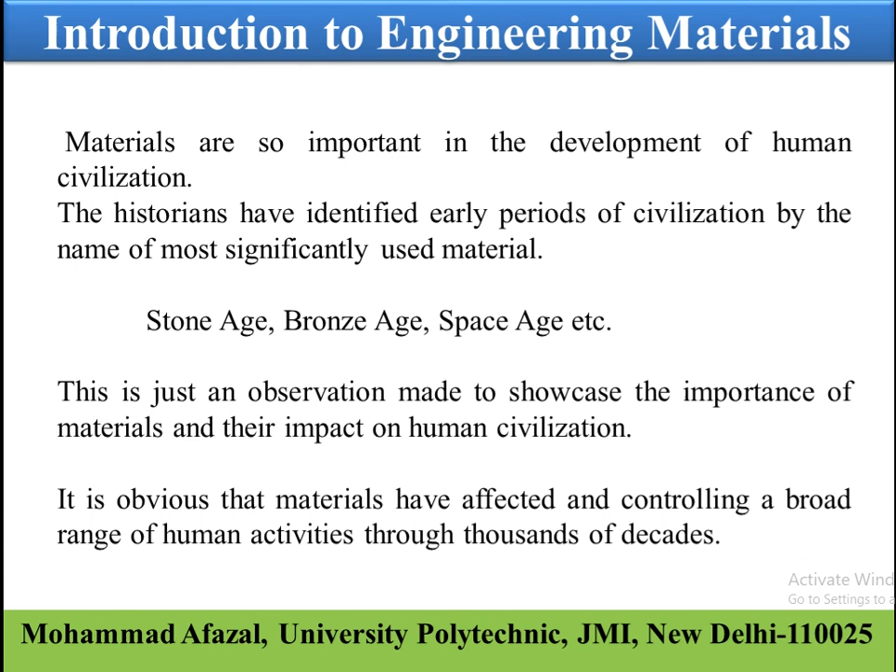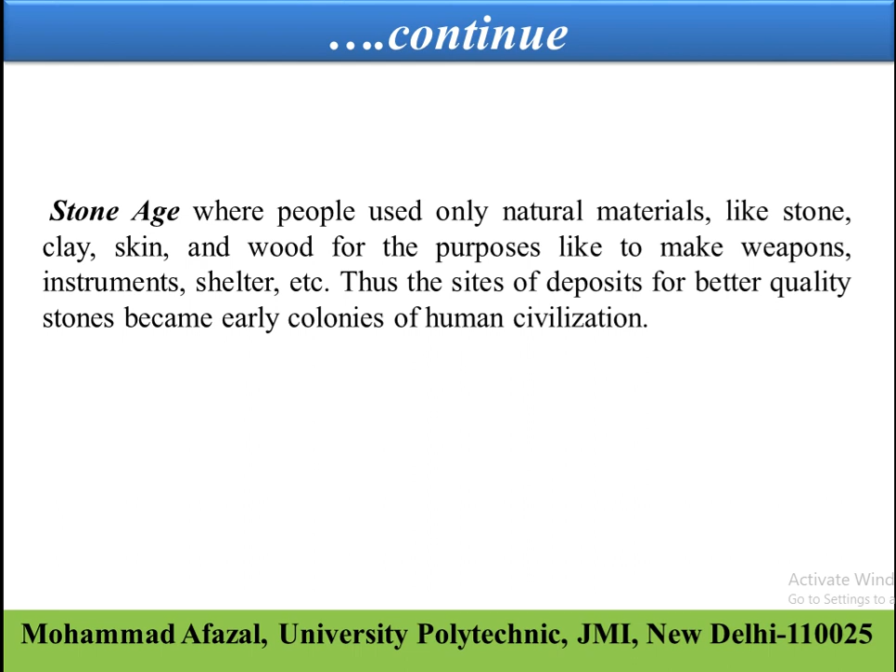Coming to the Stone Age, that was a very early stage when human beings came in contact with any kind of material. In this age, people used only natural materials like stone, clay, skin, and wood to make weapons, instruments, shelter, etc. Thus, the sites of deposits of better quality stones became early colonies of human civilization.

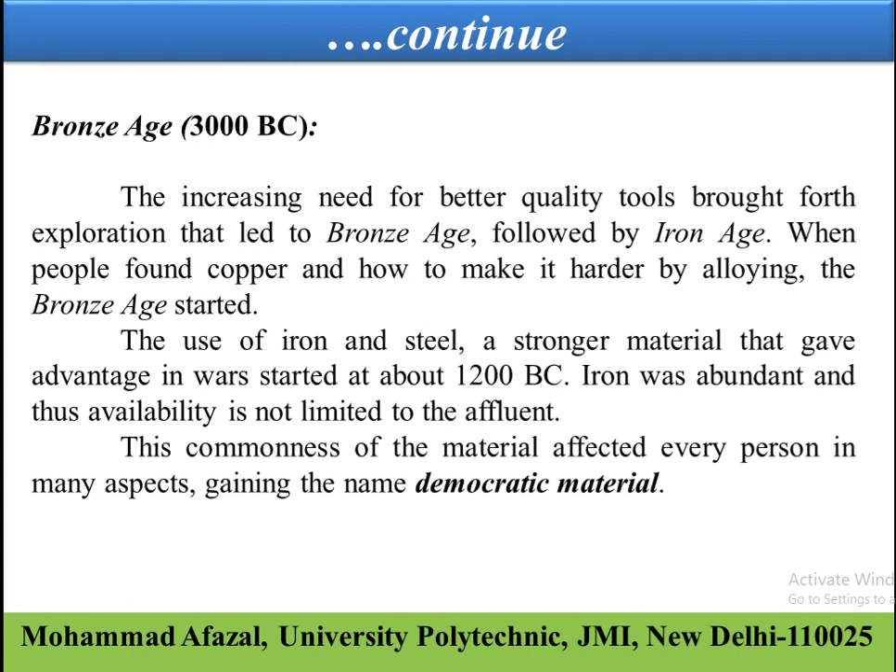Moving forward to the Bronze Age, which came around 3000 BC, the increasing need for better quality tools brought forth exploration that led to the Bronze Age, followed by the Iron Age. When people found copper and how to make it harder by alloying, the Bronze Age started. The use of iron and steel, a stronger material that gave advantage in wars, started about 1200 BC. Iron was abundant and thus its availability was not limited to the affluent. This commonness of the material affected every person in many aspects, gaining it the name of a democratic material.

The next big step in human civilization was the discovery of a cheap process to make steel, which enabled the railroads and the building of the modern infrastructure of the industrial world. One of the most significant features of the democratic material is that the number of users just exploded. Thus, there has been a need for human and material resources for centuries, which is still going strong.

Coming to the next age, that is known as the Space Age. It is said and agreed that we are presently in the Space Age, marked by many technological developments in materials, resulting in stronger and lighter materials like composites, electronic materials like semiconductors, materials for space voyage like high temperature ceramics, biomaterials, etc.

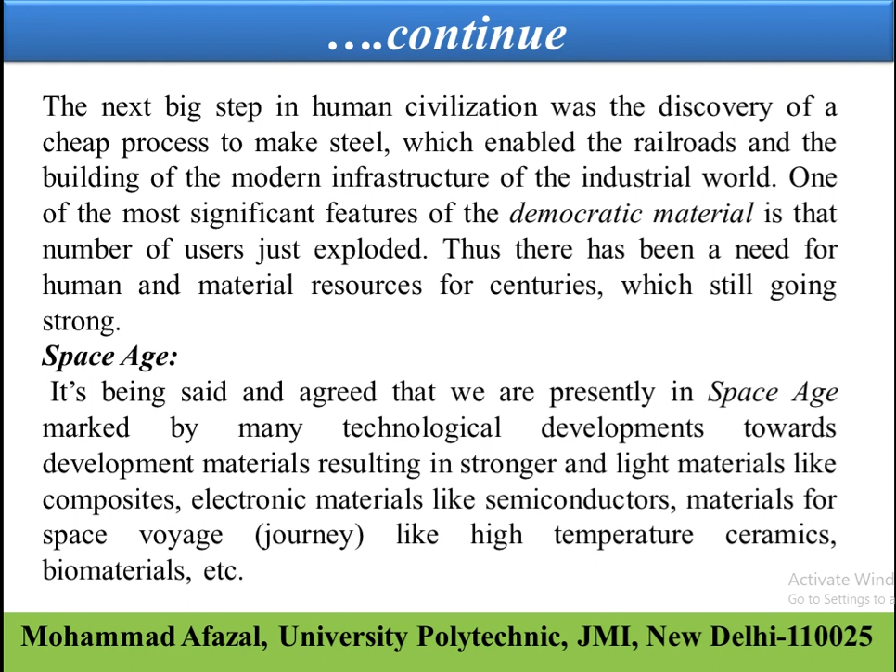If we summarize the findings of these civilizations in respect of materials and their utilization, the Iron Age brought tools and utensils, the Steel Age brought railroads, instruments, and the Industrial Revolution. The Space Age brought materials for stronger and lighter structures, that is, composite materials. The Electronic Age brought semiconductors and thus many varieties of electronic gadgets.

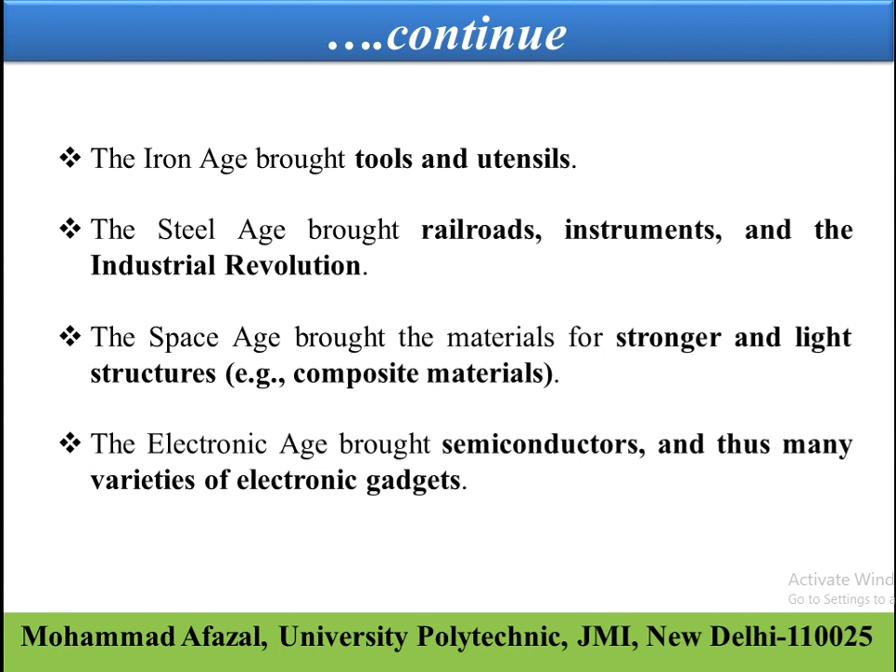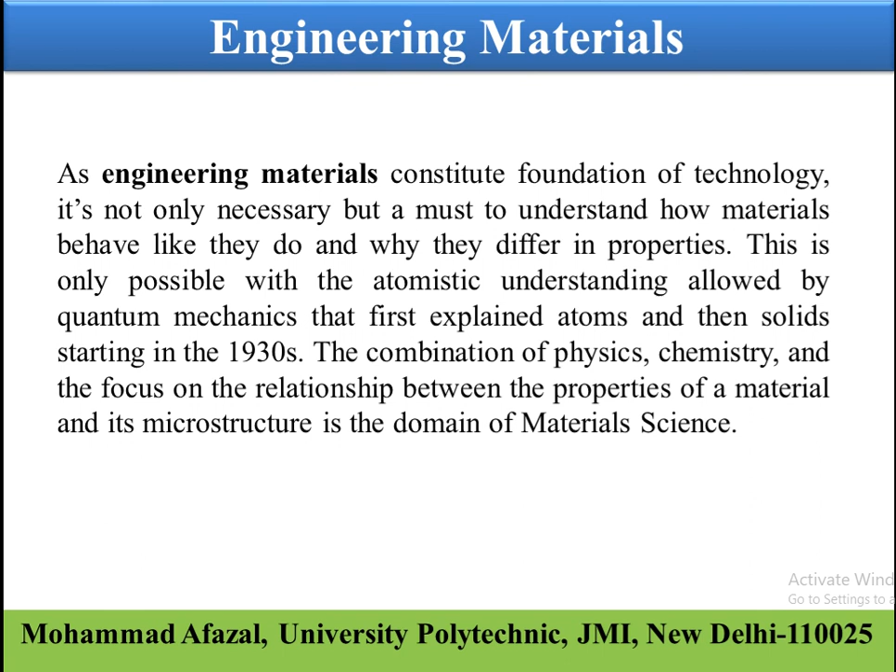Coming to the next point, how materials are used in technology and how they affect the current life of human beings. As engineering materials constitute the foundation of technology, it is a must to understand why materials behave like they do and why they differ in properties. This is only possible with the atomistic understanding allowed by quantum mechanics, which first explained atoms and then solids, starting in the 1930s. The combination of physics, chemistry, and the focus on the relationship between the properties of a material and its microstructure is the domain of material science.

Material science is a subject which must be studied by each and every engineer irrespective of their domain. All engineers need to know about materials; even the most immaterial fields like software or system engineering depend on the development of new materials, which in turn alter the economics, like software-hardware trade-offs. Increasing applications of system engineering are in materials manufacturing and complex environmental systems. Innovation in engineering often means the clever use of a new material for a specific application, for example, plastic containers in place of age-old metallic containers.

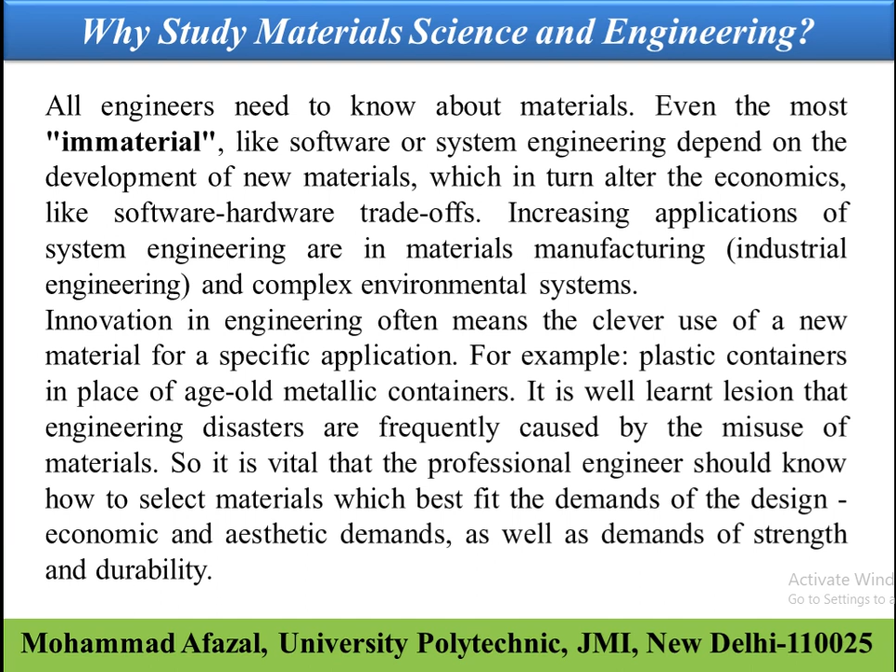It is a well learnt lesson that engineering disasters are frequently caused by the misuse of materials. So, it is vital that professional engineers know how to select materials which best fit the demands of design, economic and aesthetic demands, as well as demands of strength and durability. Beforehand, the designer must understand the properties of materials and their limitations. Thus, it is very important that every engineer study and understand the concepts of material science and engineering.

This enables the engineer to select a material for a given use based on consideration of cost and performance, to understand the limits of materials and the change of their properties with use, and to be able to create a new material that will have some desirable properties.

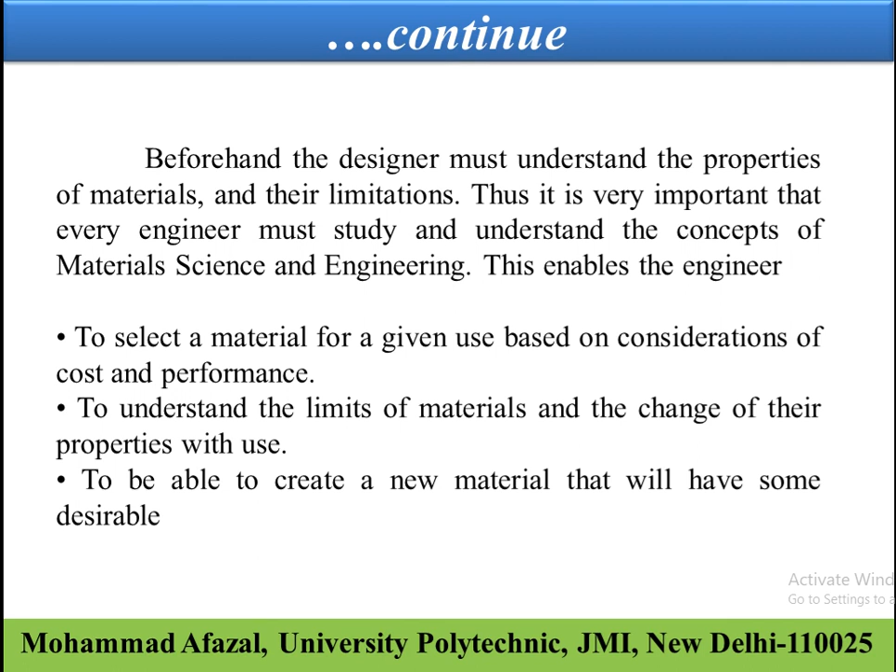Moving further on to the classification of materials. Basically, the materials at very primary stage are classified in two ways: one is metals and the other non-metals. The metals part comprises elements like cast iron, steel, copper, zinc, silver, gold, tin, etc. And non-metals have wood, plastic, wax, clay, ceramics, composites, thermocol, etc.

Further, metals are classified as ferrous metals and non-ferrous metals. Ferrous metals comprise cast iron, steel, wrought iron, etc. And non-ferrous metals have brass, bronze, nickel, silver, gold, etc.

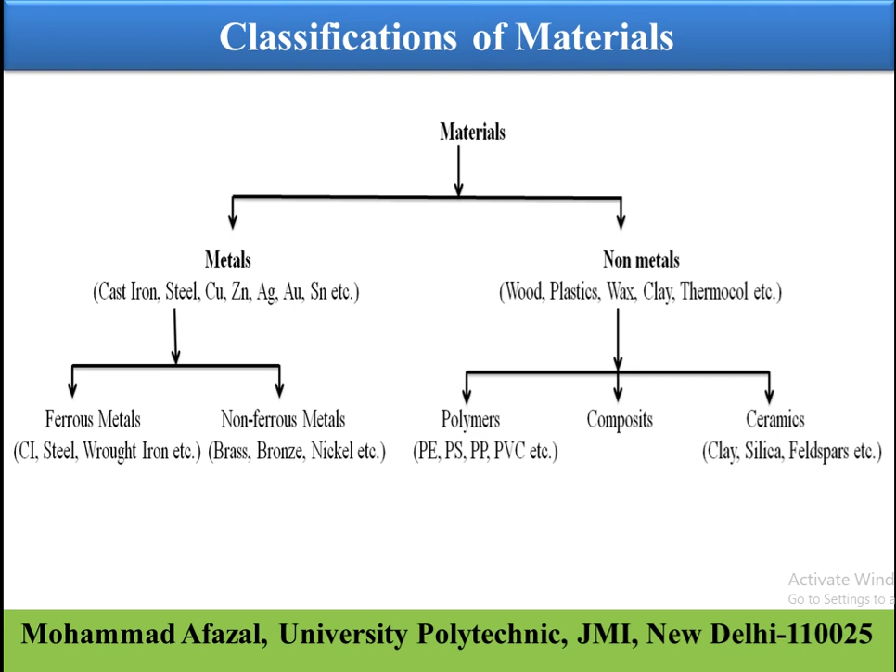Further, non-metals are classified as polymers, composites, and ceramics. Polymers have polyethylene, polystyrene, polypropylene, polyvinyl chloride, etc. And ceramics have clays, silica, feldspars, etc.

So moving on to material classification into metals and non-metals, and further metals into ferrous and non-ferrous metal. If we go on to the short definition of ferrous and non-ferrous metals, ferrous metals are those metals in which iron is their main constituent.

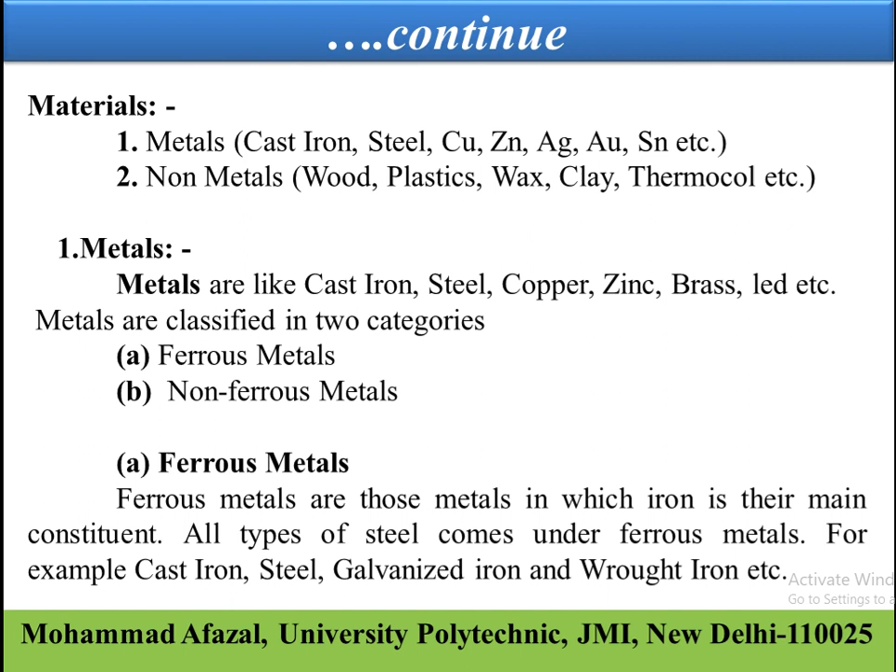All types of steel come under ferrous metals. For example, cast iron, steel, galvanized iron, and wrought iron, etc.

Non-ferrous metals are those metals in which a metal other than iron is their main constituent. For example, lead, copper, zinc, brass, tin, etc. falls under the category of non-ferrous materials.

Non-metals are like glass, plastic, rubber, Teflon, composites, etc. Further, one more category of metal comes by mixture of metals and non-metals in an appropriate ratio. Alloys are a mixture of metals and some non-metals such that there are at least two metals and other non-metals. For example, stainless steel, which has two metals as nickel and chromium, makes an alloy.

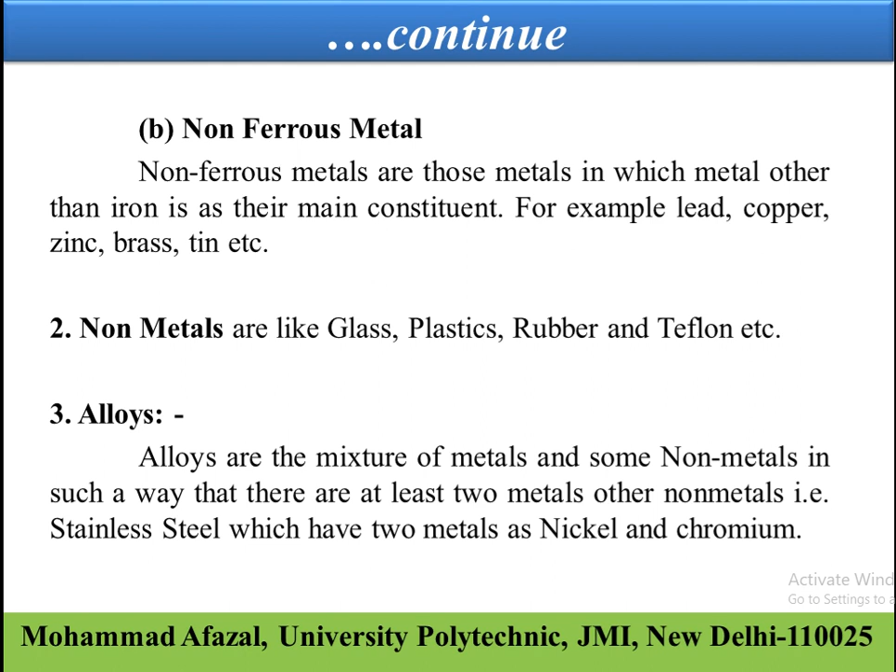Moving forward to the properties of materials, we will go for properties like physical properties, mechanical properties, electrical properties, thermal properties, and chemical ones.

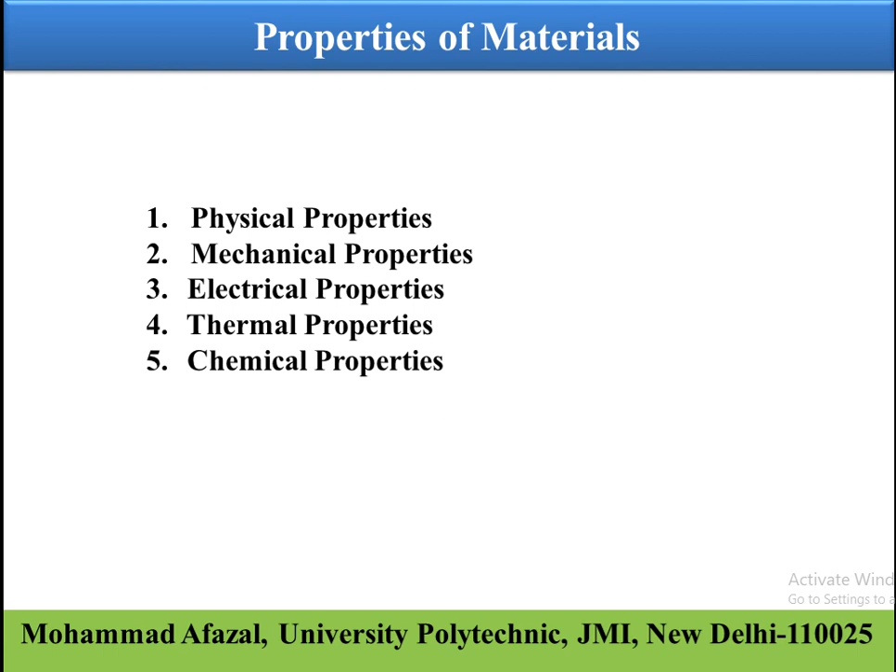We will go into detailed study of the properties of material, starting with physical properties such as shape and size, dimensions, color, appearance, density, porosity, and structure.

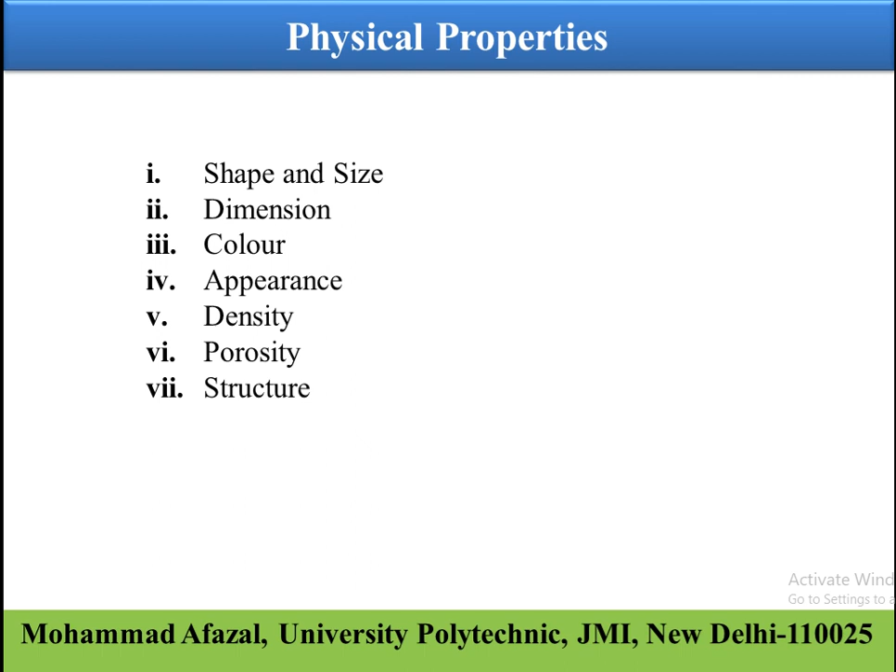Mechanical properties include elasticity, plasticity, ductility, malleability, brittleness, and so on. Next are electrical properties, which include resistivity, conductivity, dielectric constant, dielectric strength, and thermoelectricity.

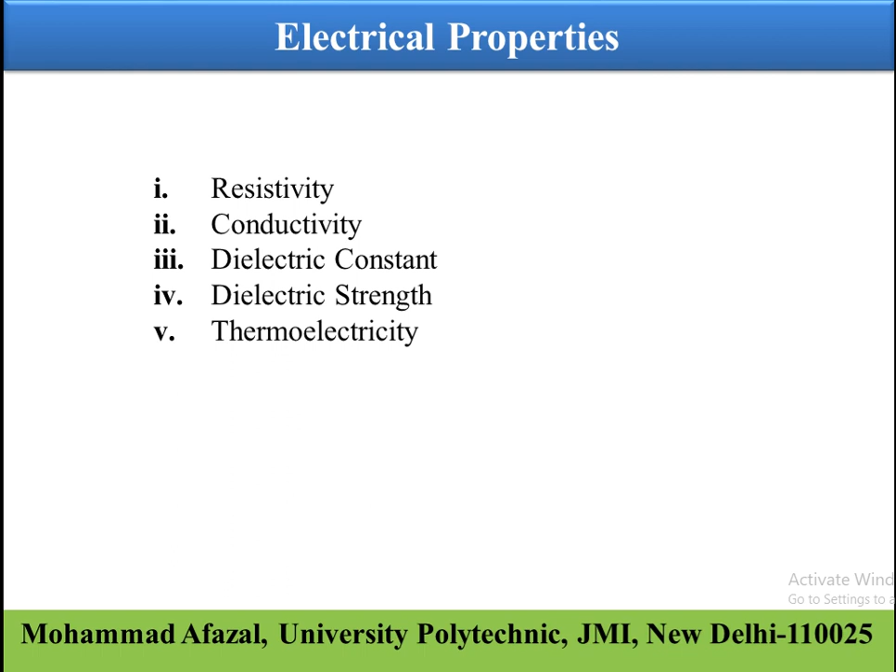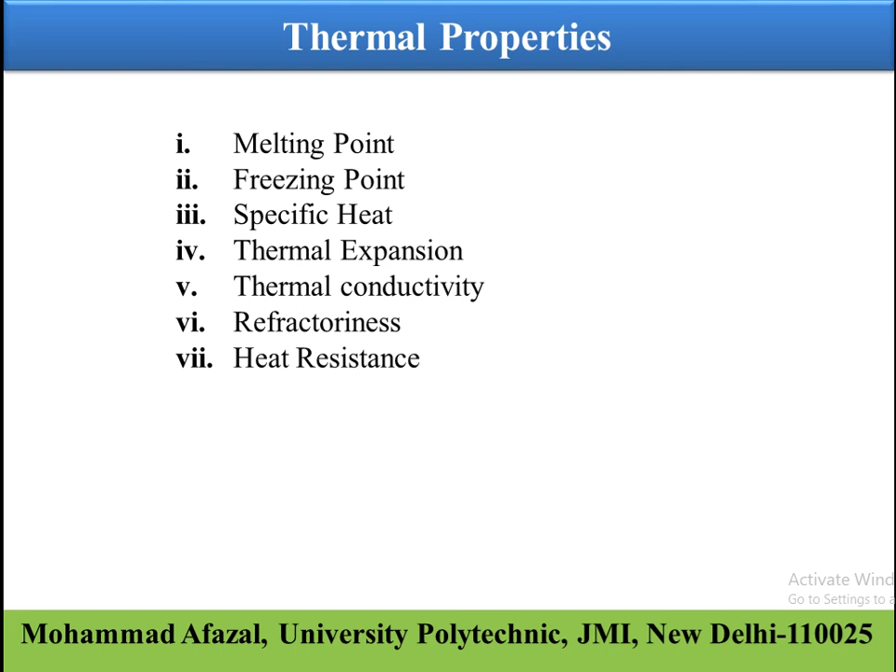Moving forward to thermal properties, which consist of melting point, freezing point, specific heat, thermal expansion, thermal conductivity, refractoriness, and heat resistance. And finally, for chemical properties: composition, corrosion resistance, and structure.

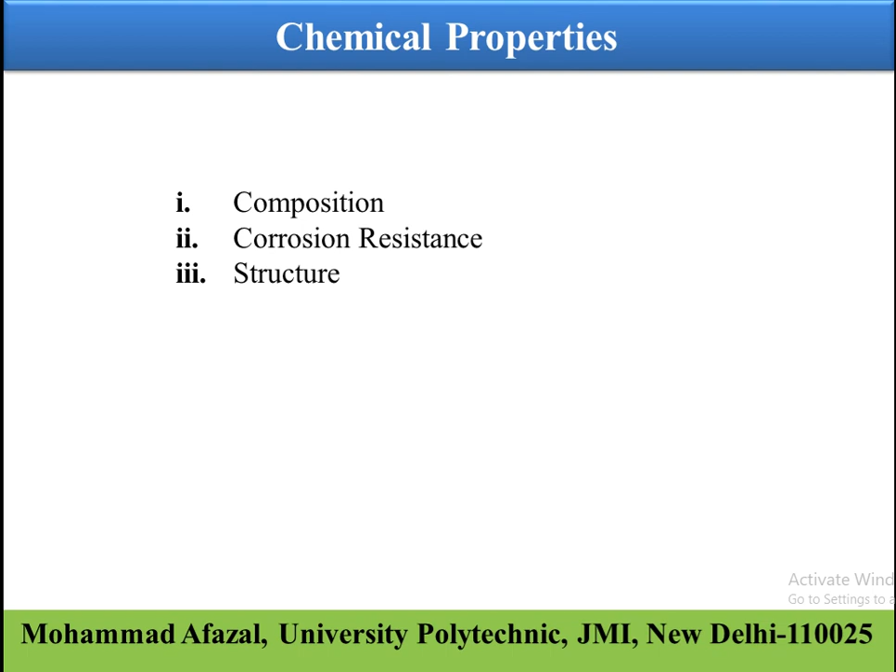We will go through each and every one in detail. Physical properties: the first definition is shape and size.

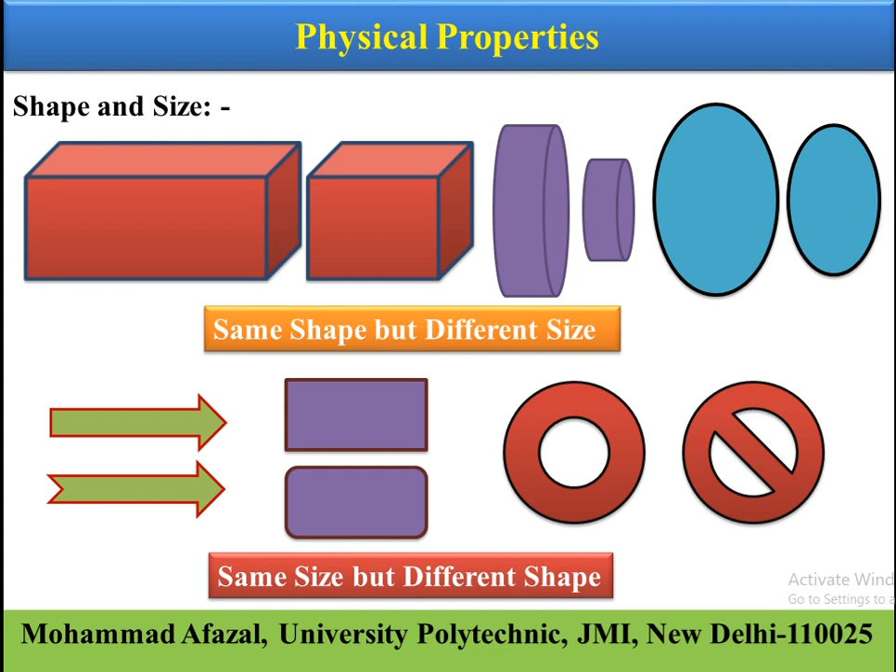Moving on to rectangles having the same size but different shapes, and lastly donuts having the same internal and external diameter, but they have different shapes.

Moving forward to the next definition of physical properties of materials, like dimensions. Dimension refers to the size of any object. It is measured in terms of length, width, height, diameter, radius, etc.

It is measured in the SI system, MKS system, CGS system. For measurement of length, we use mm as millimeters, cm as centimeter, and meter. For weight, we use kilogram, gram, pound, etc. And for time, it is seconds, and so on.

Color is another physical property of any material. It is an important property to identify the originality as well as quality of material. The color of the material depends on the wavelength of light that the material absorbs. Besides this, color is introduced into various materials in the form of coloring pigments and dyes to produce attractive artificial color.

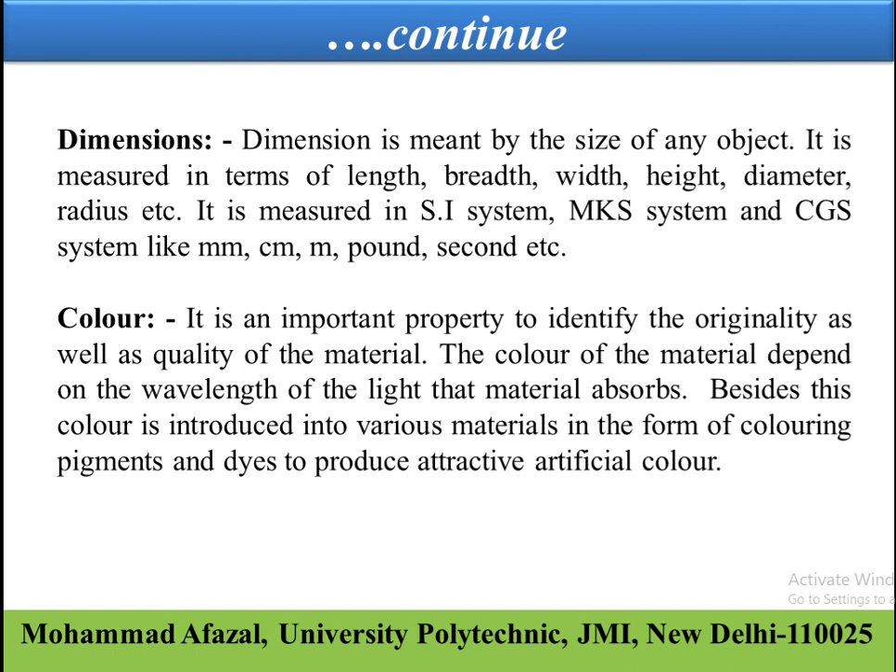Moving forward onto appearance, it includes luster, grains or marks, texture, etc. Luster is the ability of material to reflect light. Texture is the quality of material, like textile materials, cloth, different kinds of papers, and grains or marks is the quality of certain high quality planks.

Density is an important parameter and physical property used to study metallurgical properties of material. How closely atoms are arranged of definite mass in unit volume is defined by the density of that particular object. Numerically, it is expressed as the ratio of mass over volume.

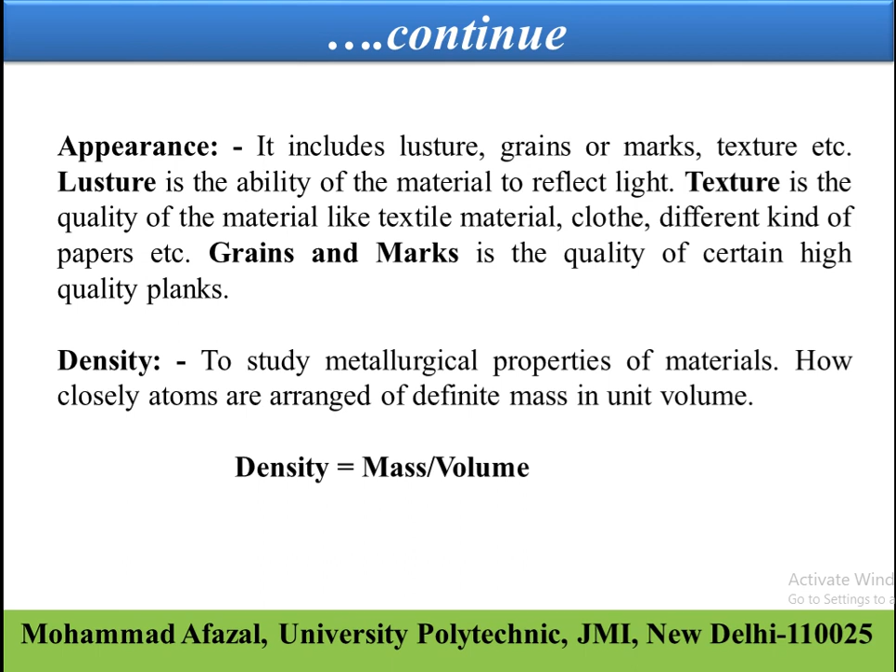Next is the porosity in the sequence of physical properties of material. It defines the voids present inside the molecules during solidification, measured as total volume of void to the total volume of material. Porosity leads to lower thermal conductivity of material, and is responsible for dry corrosion in metals and weakening of ceramic materials.

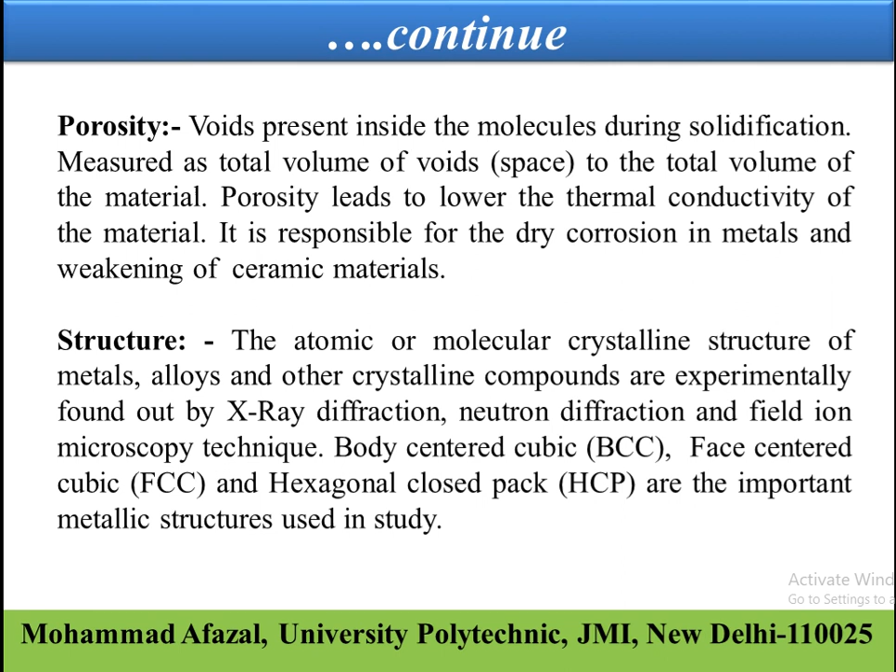We come to the structure. The atomic or molecular crystalline structure of metals, alloys, and other crystalline compounds are experimentally found out by X-ray diffraction, neutron diffraction, and field ion microscopy technique. Body-centered cubic crystal (BCC), face-centered cubic crystal (FCC), and hexagonal close-packed structures are important metallic structures used in the study.

Moving forward to the mechanical properties of a material, before going on to the individual definitions of different properties of material, here I'm displaying a stress strain diagram that is most widely used to explain the different mechanical properties of any material.

Here I am showing a stress strain diagram for a ductile material that clearly shows the elastic region, plastic region, and different points which we find when a standard specimen is subjected to tensile loading onto the UTM machine.

As we increase the loading onto the specimen, it starts to elongate, but up to a certain point, that point is known as the elastic point or limit of proportionality. It regains its original shape and size after unloading the component.

That proportionality limit holds good, and the scientist known as Hooke gives a very good definition that strain is directly proportional to stress up to the elastic point. That proportionality constant is known as the Young's modulus, represented by capital E, and that is equal to stress divided by strain.

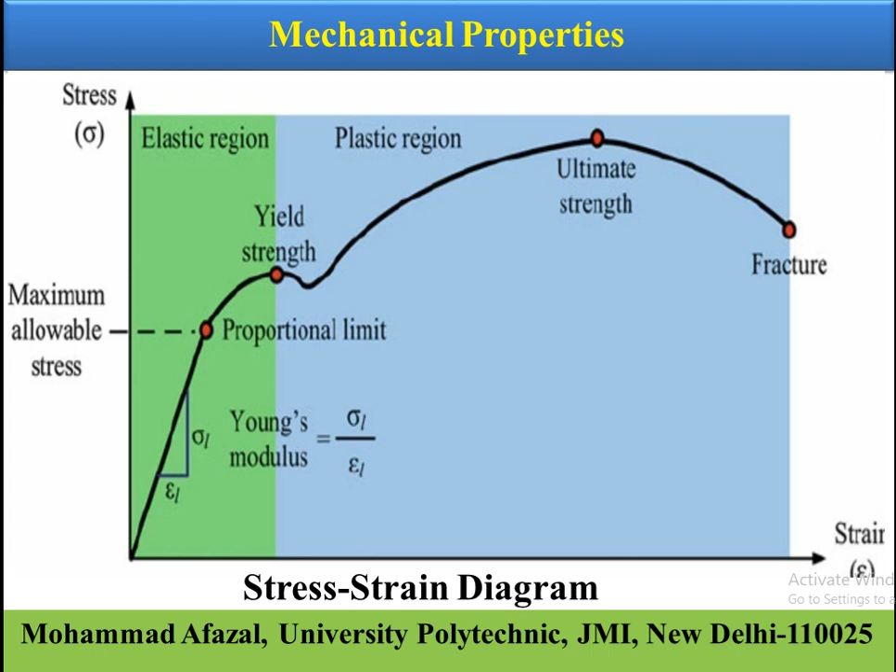Further enhancing the load over the specimen, we get the yield point, and after that we enter into the plastic region, and subsequently we find ultimate strength, and finally the fracture point of that material.

Moving forward on to the individual definitions found over the stress strain diagram, and with the help of that diagram, we explain each and every mechanical property of the component.

First one is the elasticity. It is the tendency of solid metals to regain its original shape and size from its deformation as soon as the stresses are released. Elasticity is measured in terms of Young's modulus of elasticity, represented by capital E.

This is equal to the ratio of stress and strain in the form of force, area, and length. We define stress as force per unit area and strain as the ratio of change in length over original length. Finally, we get modulus of elasticity as force into original length divided by area into change in length.

Plasticity is the tendency of material to get permanently deformed gradually up to the yield point when material is subjected to external load which overcomes the elastic limit.

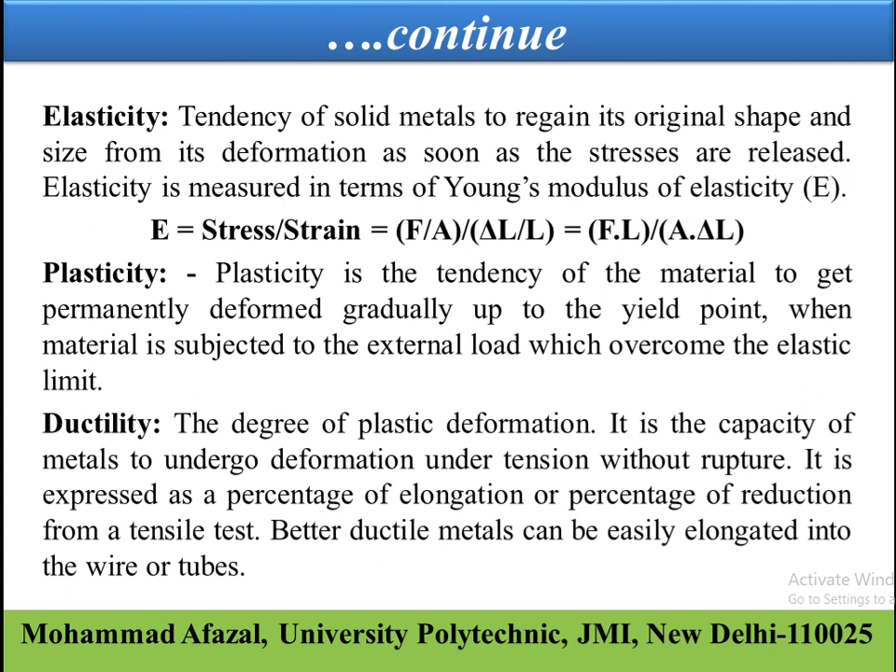Next property is the ductility. Ductility is basically the degree of plastic deformation. It is the capacity to undergo deformation under tension without rupture. It is expressed as a percentage of elongation or percentage of reduction from a tensile test. Better ductile metals can be easily elongated into wire or tubes.

Next one is the malleability. It is the ability of metals or alloys to withstand deformation under compressive loading. To make thin sheets, hammering or rolling operations are performed on malleable materials without causing the material to crack. Gold is the most malleable metal and may be beaten into very thin sheets.

Brittleness is another mechanical property of the material. It is the tendency of material which does not allow any dimensional change or any kind of plastic deformation into it. Materials that are brittle show only slight permanent distortion before breaking. An elongation less than 5% in a 50 mm gauge length is considered a brittle material.

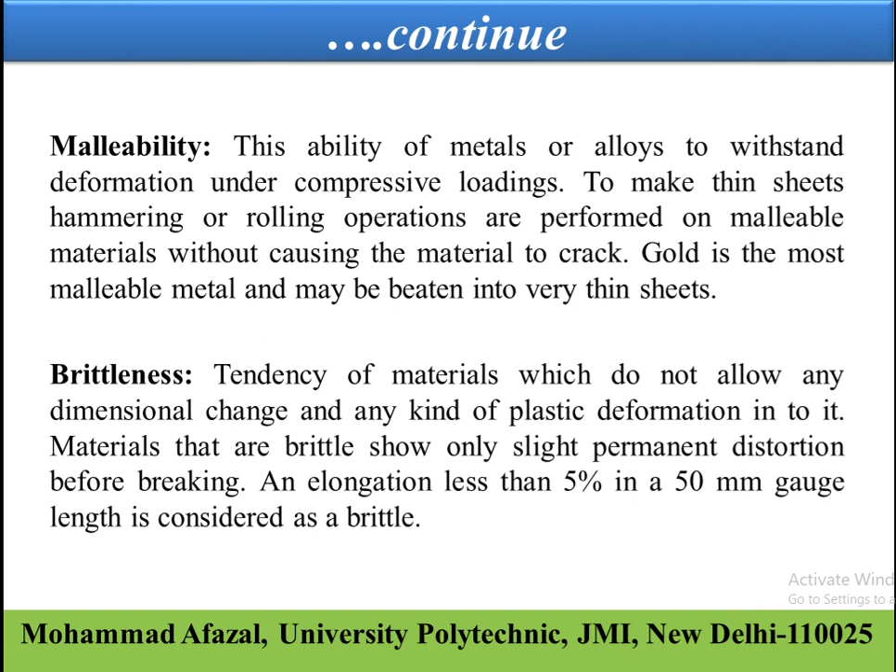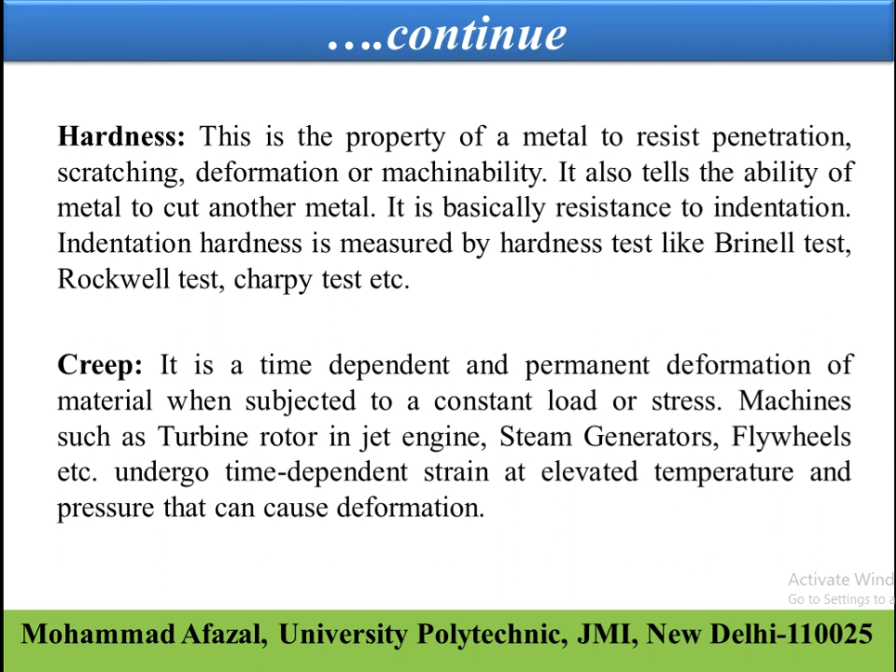Creep is an important property which is widely used during the design of any machine component or any large size engine. It is a time dependent and permanent deformation of material when subjected to a constant load or stress. Machines such as turbine rotors in jet engines, steam generators, flywheels, etc. undergo time dependent strain at elevated temperature and pressure that can cause deformation.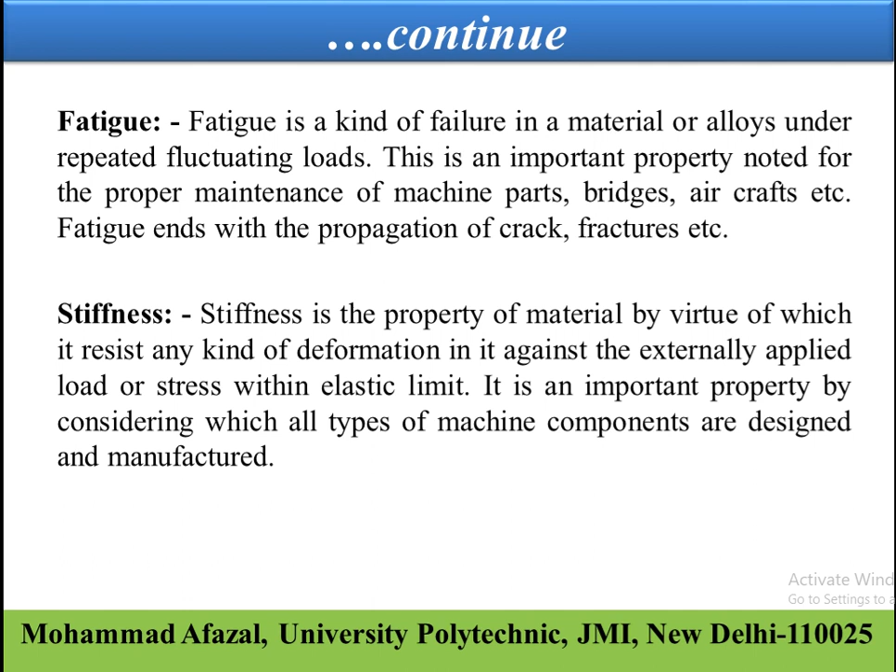Moving forward to toughness, it is defined as the ability of material to withstand bending on the application of shear stress without fracture. It mainly depends on the tensile strength and ductility of materials. Copper is found to have greater toughness than cast iron. It is the ability of material to absorb energy and deform plastically before fracture.

Resilience is the ability of material to absorb energy up to the elastic limit when it is elastically deformed by loading, and releasing the same amount of energy upon unloading.

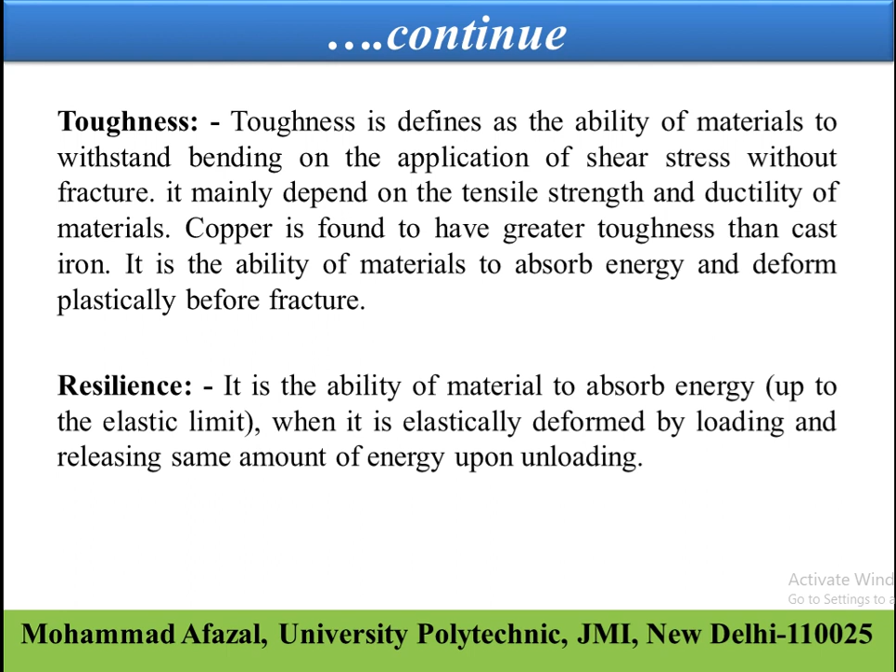Now coming to tensile strength, yield strength, shear strength, and so on: tensile strength is the measure of strength and ductility of the material. Ultimate tensile strength is the force required to fracture a material. Tensile strength is equal to maximum tensile load divided by original cross-sectional area.

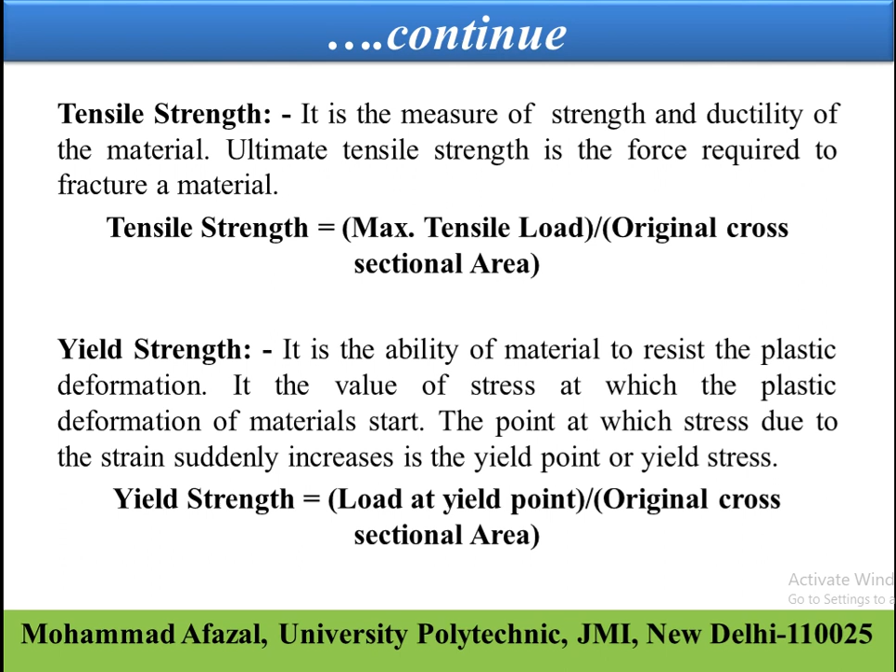Yield strength is the ability of material to resist plastic deformation. It is the value of stress at which plastic deformation of materials starts. The point at which stress due to strain suddenly increases is the yield point or yield stress. Yield strength is the ratio of load at the yield point to the cross-sectional area of the component.

Moving forward to shear strength, it is the maximum value of tangential stress applied to shear it off across the resisting section. It determines the material's ability to withstand forces acting tangentially, causing crystal dislocation due to relative movement of layers. Shear strength is the ratio of maximum tangential load to the original cross-sectional area.

Compressive strength gives details regarding the breaking power of materials. It is the maximum value of compressive stress applied to break it off by crushing action. Compressive strength is the ratio of maximum compressive load to the original cross-sectional area of the component. These are all the mechanical properties of any material.

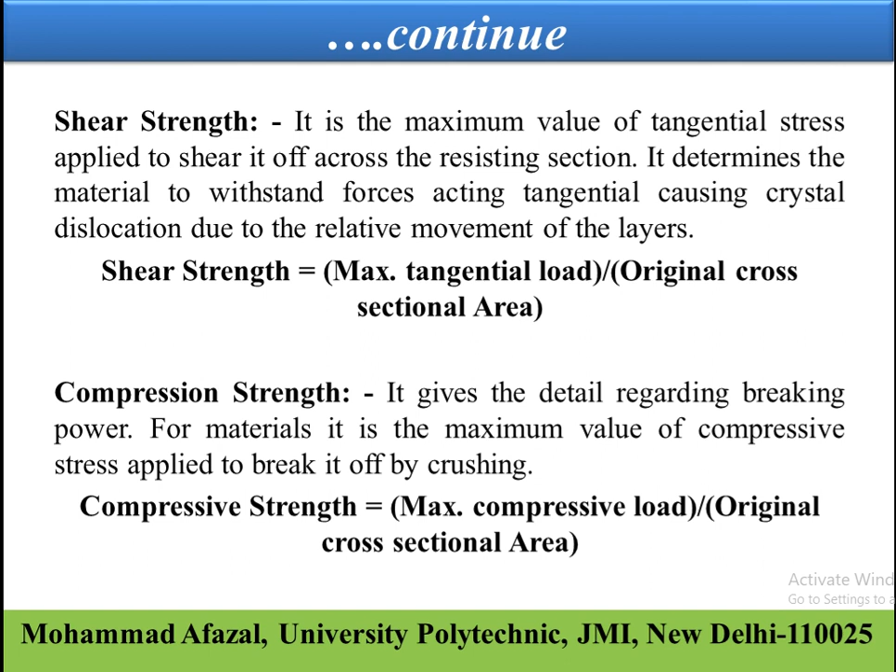Moving forward to electrical properties, first is resistivity. It is defined as an electrical property of material that measures how strongly the material resists electricity passing through it. It is directly proportional to the cross-sectional area of the material and inversely proportional to the length. It is denoted by the symbol rho, proportional to area and inversely proportional to length. Removing the proportionality constant gives us the resistance.

So resistivity is equal to R A divided by L, where rho is the resistivity, R is the resistance of the material, A is the cross-sectional area, and L is the length of the material through which current is trying to pass.

Conductivity is the next electrical property, which is the inverse of resistivity. It is an electrical property of material that permits or allows electricity to pass through it. Conductivity is the reciprocal of electrical resistivity. It is defined as sigma, the reciprocal of resistivity rho, and is equal to L divided by R into A.

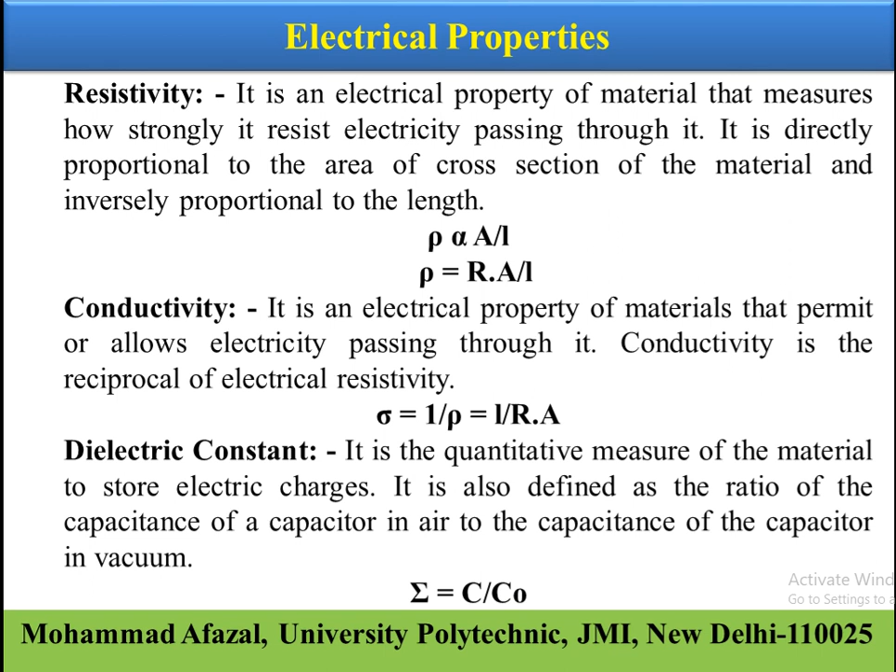Dielectric constant is the next electrical property. It is the quantitative measure of a material's ability to store electric charges. It is also defined as the ratio of capacitance of a capacitor in air to the capacitance of a capacitor in vacuum. Sigma is equal to C divided by C0, where C is the capacitance of capacitor in air and C0 is the capacitance of capacitor in vacuum.

The next electrical properties are dielectric strength and thermoelectricity. Dielectric strength is defined as the limitation of electrical field intensity above which breakdown occurs, that is, the insulators get ruptured or punctured. Increase in thickness of material, increase in time of application of electric current, and increase in humidity all decrease the dielectric strength of the material.

Thermoelectricity is defined as follows: if two metals are joined end to end and one of the junctions is gradually heated, a small current in millivolts is produced, known as the thermoelectric effect. This kind of thermocouple is used in the thermocouple pyrometer, photoelectric cell pyrometer, etc. These are the electrical properties of materials.

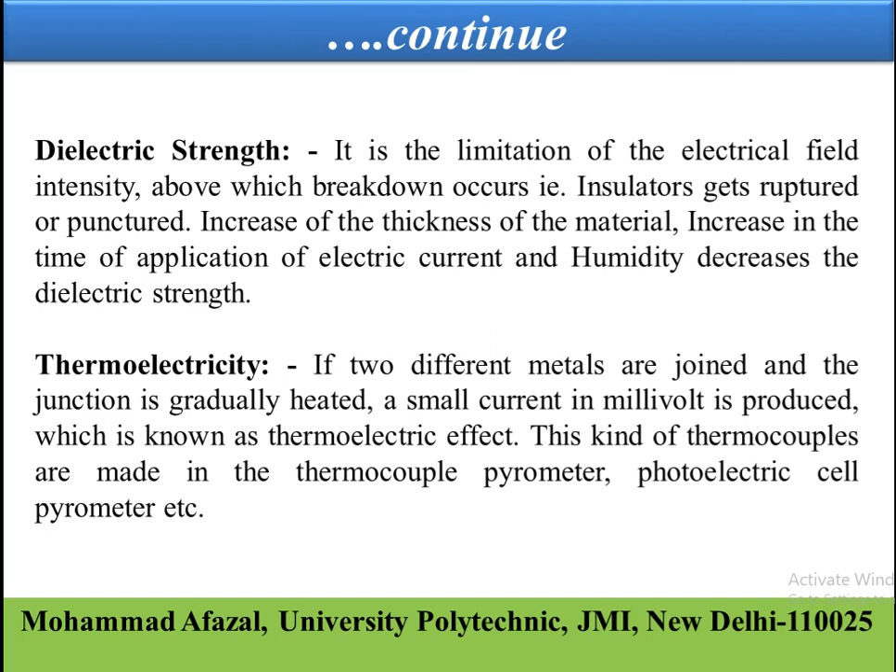Moving further to thermal properties of materials, the very basic properties are melting point and freezing point. Melting point is the temperature at which a solid changes into the liquid state. Metals and covalent compounds have a sharp melting point, which helps identify them. In the case of polymers, crystalline polymers have a crystalline melting point temperature, represented as Tm, and for amorphous polymers only the glass transition temperature exists, defined as Tg.

Freezing point is the next thermal property. It is the temperature at which liquid changes into the solid state. Water freezes at 0 degrees centigrade, that is 273 Kelvin. Different materials have different melting and freezing points. These properties help in the processing and alloying of materials.

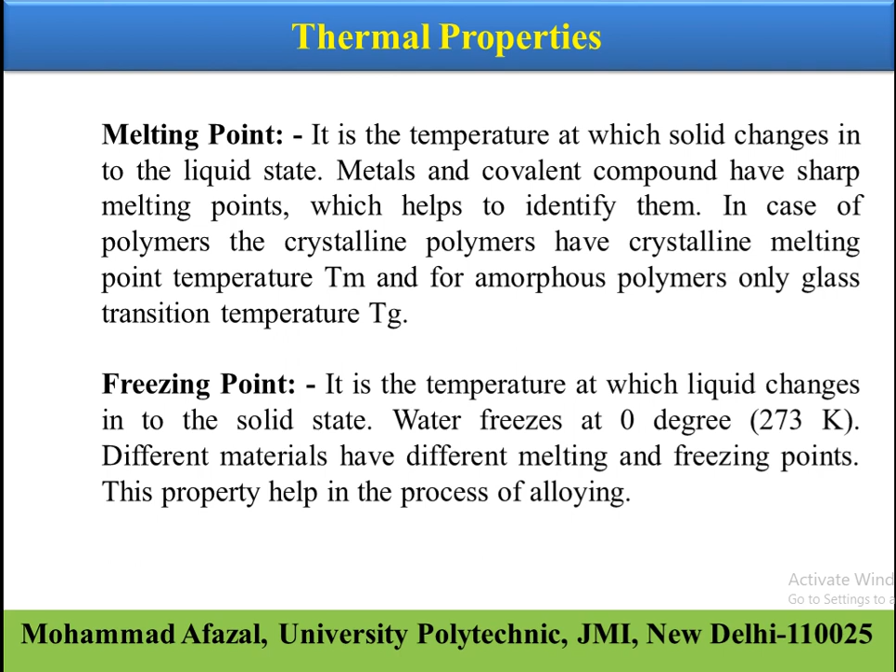Moving forward to specific heat, it is related to the heat capacity. It is the heat absorbing capacity of material from its surrounding. It is defined as the quantity of heat required for raising temperature of unit mass of solid material by 1 degree. It may be represented by Cp or Cv. Cp is the specific heat at constant pressure and Cv is defined as the specific heat at constant volume.

The amount of heat required for any material to raise temperature by 1 degree centigrade, that is dq, raised the temperature by some degree centigrade having the temperature change of delta T, that amount of heat required, dq, is equal to m Cp or Cv delta T. From here we can define Cp or Cv, that is the specific heat, as equal to dq divided by

mass into temperature change. Moving forward to the thermal expansion, it is the tendency of materials to change its shape, size in response to a change in temperature. Thermal expansion may be 1D, that is linear, 2D, that is areal, and 3D, that is volumetric. The coefficient of thermal expansion is used to calculate the amount of expansion. Linear coefficient of thermal expansion is represented by alpha.

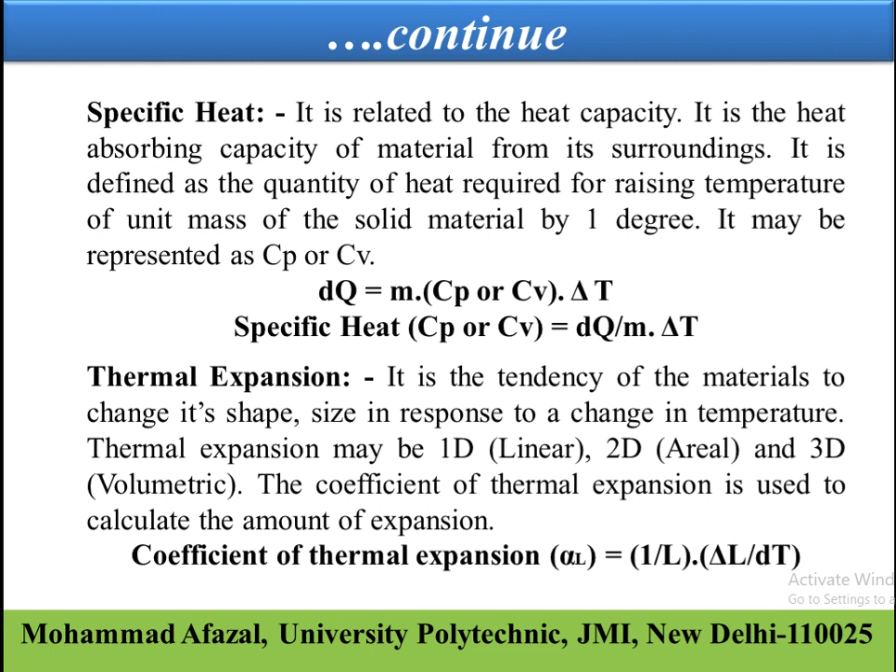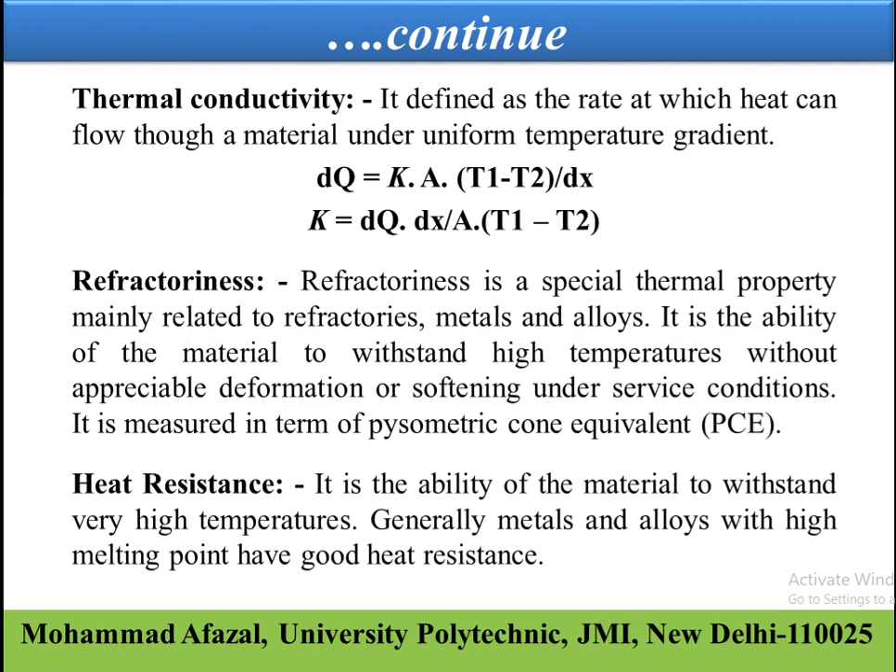Next thermal properties of materials are refractoriness and heat resistance. Refractoriness is a special thermal property mainly related to refractories, metals and alloys. It is the ability of material to withstand high temperatures without appreciable deformation or softening under service conditions. It is measured in terms of pyrometric cone equivalent, abbreviated as PCE. Heat resistance is the next thermal property. It is the ability of material to withstand very high temperature. Generally, metals and alloys with high melting point have good heat resistance.

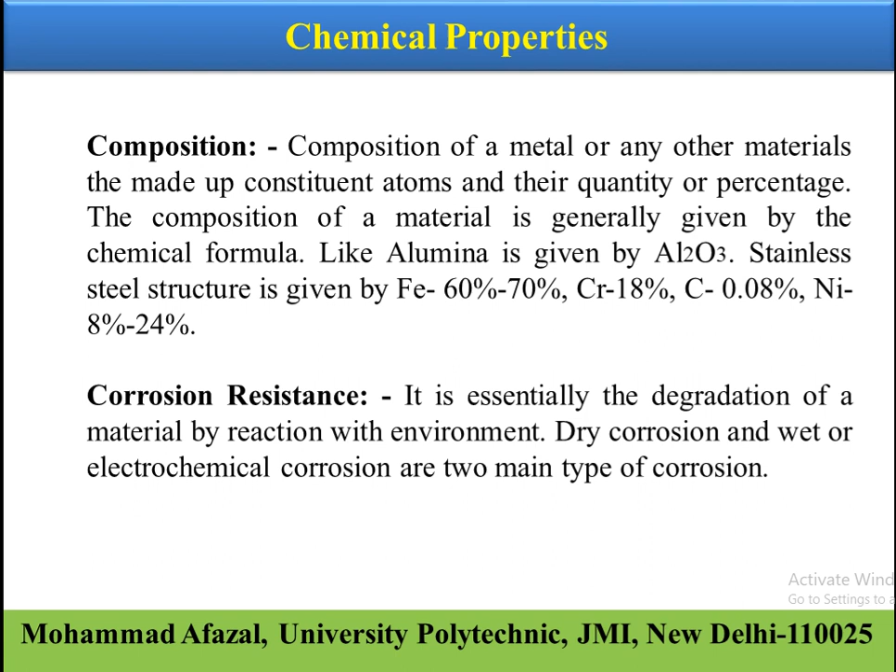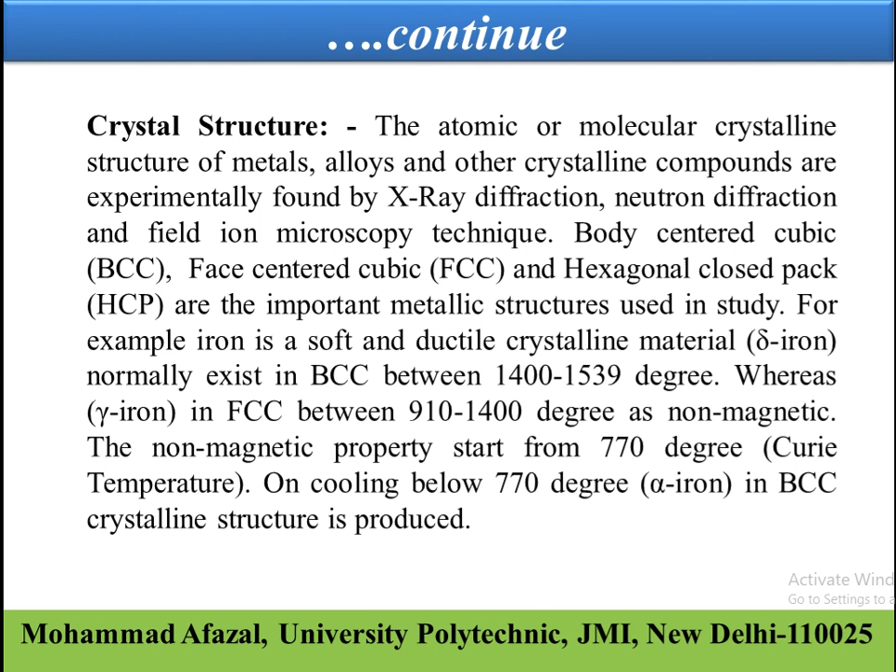and chemical properties of the material. All these study materials have been prepared with the help of NPTEL lectures by Professor Satish V. Kailas from IISc Bangalore, the W.D. Callister book, a very useful, very important book of material science and engineering, and V. Raghavan's Material Science and Engineering book, written by Professor V. Raghavan, former professor of IIT Delhi. I refer you to these books and the NPTEL lecture series for depth of knowledge.